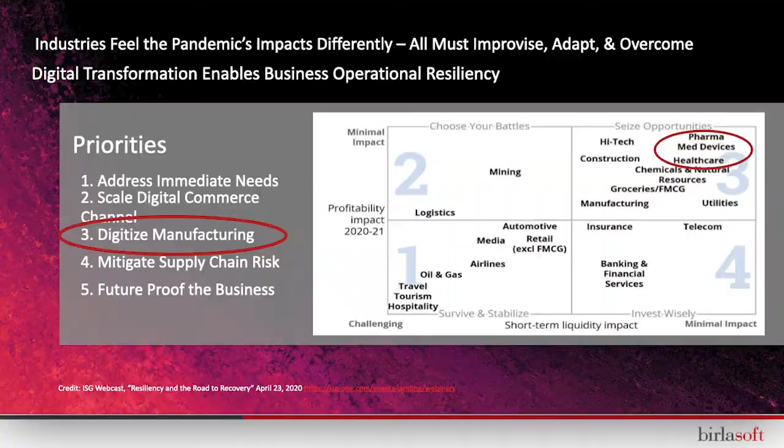Obviously, the broader global economy will continue to feel the effects of the pandemic for quite some time. But when you look at the economy from an industry perspective, it becomes quite obvious that the effects are not uniform, as this chart from a recent webinar from the analyst firm ISG1 shows. Those industries whose occupants have been left fighting for survival are in the lower left, quadrant 1. The unfortunate occupants there include obvious victims in the travel and airline industries. On the other end of the spectrum are those industries residing in the upper right quadrant, who may see selective or widespread opportunities if they have the foresight to seize them.

And this is where medical device and pharmaceutical companies find themselves, for the most part anyway. Yes, there were near-term downturns in elective procedures and non-critical care, but overall companies in this segment are getting on with strategic business adaptations. And you see that digitizing manufacturing is identified as critical when your employees are scattered remotely and need to access the information that's critical to run the business. Manufacturing flexibility has also become a priority.

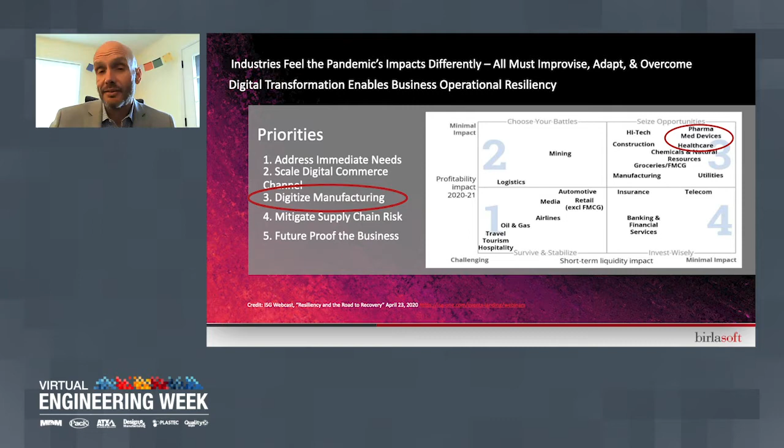I think this also ties in with future-proofing the business, as we're seeing industry invest in modernizing systems, automating business processes, and in data and analytics in a big way - all to ensure IT systems and business processes are hyper-resilient to future disruptions by upgrading, replatforming, consolidating, and automating where appropriate. Overall, companies are taking this time to modernize business applications in general, largely to enable the harvesting of insights from the vast amounts of data being collected these days.

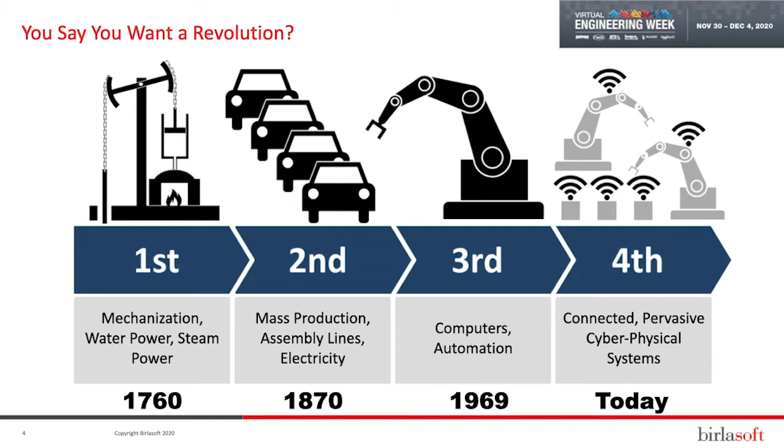You say you want a revolution and you want it now. You're in luck, because we're in the midst of an industrial revolution right now - specifically the fourth industrial revolution. Manufacturing 4.0 and the connected plant concepts are part of it, enabled by connected, pervasive, cyber-physical systems. And the COVID pandemic has only accelerated industry's investments in their digital transformation. As Satya Nadella, the CEO of Microsoft, put it in their earnings call back in April, 'We've seen two years worth of digital transformation in two months.'

We've seen this too. Much of the investment is going on in the life sciences industries as they look to ramp up production of various medical equipment, including PPE, hospital beds, and ventilators, while simultaneously trying to be more flexible - to be able to manufacture anywhere, should another weather disaster or a pandemic unfortunately take some global locations offline.

There's a lot of consideration and talk about bringing manufacturing back onshore. These initiatives generally require agility and efficiency improvements, enabled by enforcing process standardization and monitoring equipment and plant performance across global plants remotely. Also being able to maximize process and product quality and leverage predictive plant maintenance capabilities, all important for driving efficiency, reducing costs, and better serving the customer.

You might be surprised at how big this need is to digitally transform manufacturing. A case in point: one of our large device manufacturing customers has over 50 plants globally, and less than half run on a modern manufacturing execution system. Many manage their product schedules and production execution purely on spreadsheets, or in some cases even on paper.

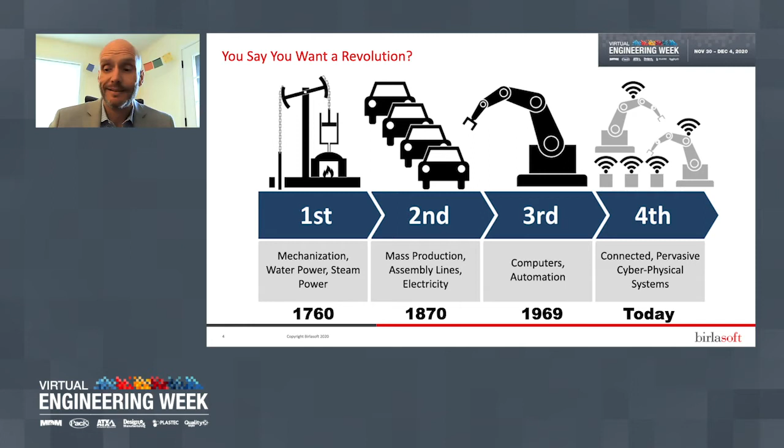There's a paradigm shift we've been seeing with big data. The volume of manufacturing process data, which can be defined as time series data generated by process control systems, laboratory systems, and other plant floor equipment, has increased dramatically in our current revolution. We're now dealing with the realm of big data.

But without the right governance processes and technology in place, big data is nothing more than a wasted opportunity for improvement. According to a recent study, close to 60% of life sciences companies are still using Excel to aggregate and analyze process data, and 61% of those surveyed said they still have data on paper. Wow, so there's massive opportunity for improvement here.

Big data offers a new style of data analytics, different from traditional business intelligence. And with the right analytics tools, its potential to deliver game-changing, highly valuable cognitive insights is massive, and the scope of the insights is wide and deep.

Traditional BI projects require business users to know what kinds of questions they want to ask beforehand. The questions they wanted to ask drove the data model of the data warehouse that the analytics came out of, and how that data was stored. The data model also drove what data was collected and by what mechanism. Creating this enterprise data model could be a lengthy process, in many cases resulting in a system that was slow to adapt to changes within the business, changes to the questions we wanted to ask of that data, and the insights we need as our business realities change.

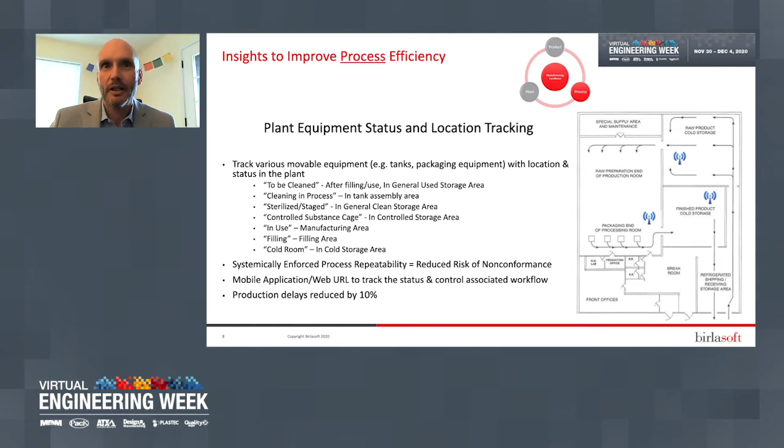Looking at the process, one challenge you may find surprising is that just locating movable equipment and ensuring it's ready for the next production run is a challenge. A startling statistic is that more than 70% of respondents from a recent study aren't fully aware of when their equipment is due for maintenance, upgrade, or replacement, thereby taking it out of availability for production.

We worked with a large life sciences company to put sensors on all of their movable production equipment and tie the location data within the plant to an IoT platform to help them track the location and status of the equipment. Manufacturing systems now have seamless access to that information so it can be systemically and proactively ensured that all equipment is in the right position as well as has the right status, being cleaned, sterilized, in use, or out of service.

And having this process data-enabled and data-controlled, off the spreadsheet and paper, has driven improvements in process repeatability, which has reduced nonconformances and reduced production delays by almost 10%.

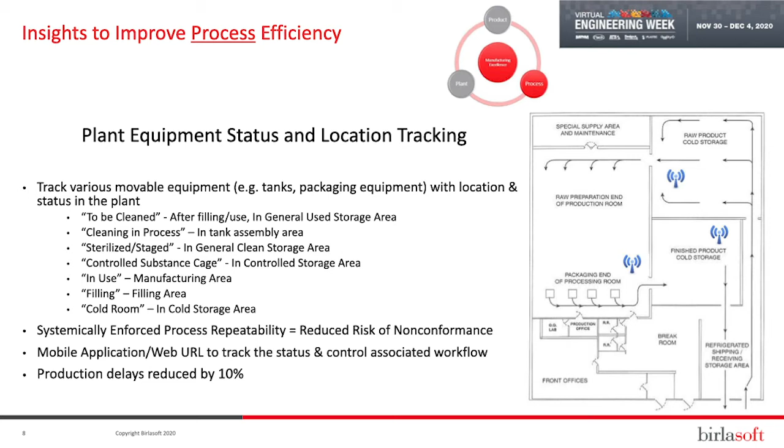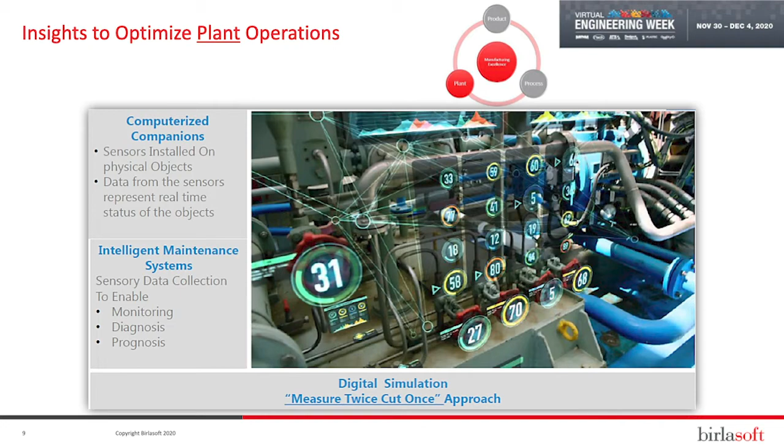According to Aberdeen Research, 82% of companies have experienced unplanned downtime over the past 3 years, and that unplanned downtime can cost a company as much as $260,000 an hour. Unplanned downtime results in lost productivity, increased cost to repair and expedite production, delayed order completion, and loss of customer trust.

Enter digital twins. They've been around as a concept for almost 20 years, but the technology has really taken off more recently as big data analytics technology like AI, machine learning, and IoT have come to the mainstream. But what are digital twins?

They can be understood as virtual models of an actual product, service, or piece of equipment, facilitating the convergence of the physical and digital worlds. We're seeing digital twin technology embedded in smart medical devices, but also in the plant equipment used to make those devices.

When setting up a new facility or making physical changes to an existing plant, factory planners need to design, model, and test factory layouts before going into production. But that may not always be that simple. There could be hundreds of scenarios to consider and combinations of plant equipment and where they're set up to consider, and too many unpredictable factors come into play for us to process manually.

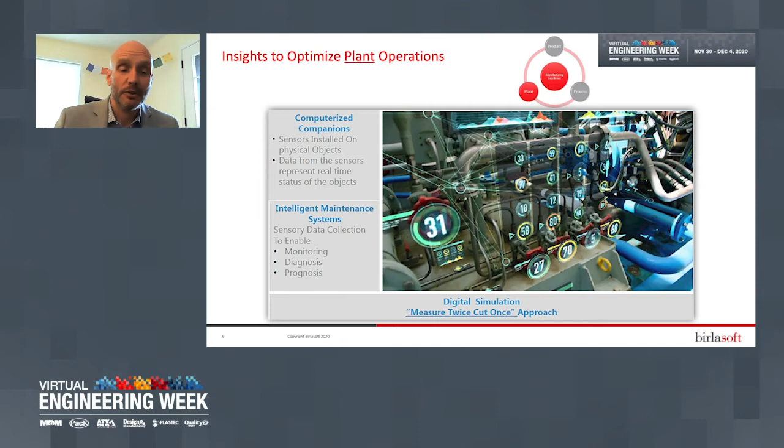But by creating a 3D digital twin of the factory, planners can assess and measure the impact of various assembly line designs and equipment layouts and come up with the most optimal factory plan. The digital twin isn't just a 3D rendering of the physical space and equipment, but is tightly integrated with the equipment designs, providing the ability to track and manage usage and critical performance data that can be analyzed to predict failures and avoid downtime and the cost and customer experience impacts associated with it before it occurs.

So I'm going to hand it off to Adavit now to go through a little more real world examples of what we've done in this space with advanced technologies to help companies digitally transform their business processes in manufacturing.

Hey John, thank you very much, and thanks for that very insightful view. I think to get started, it's very important to have a clear understanding of what your objectives are.

On this particular slide, you'll see there are a few key performance indicators that we have identified. Every organization will have very different objectives. We have worked with some med device customers who said that for them, overall equipment efficiency is more critical. There have been a few customers for whom equipment uptime is more critical. We do have a few customers for whom shop floor productivity is very critical.

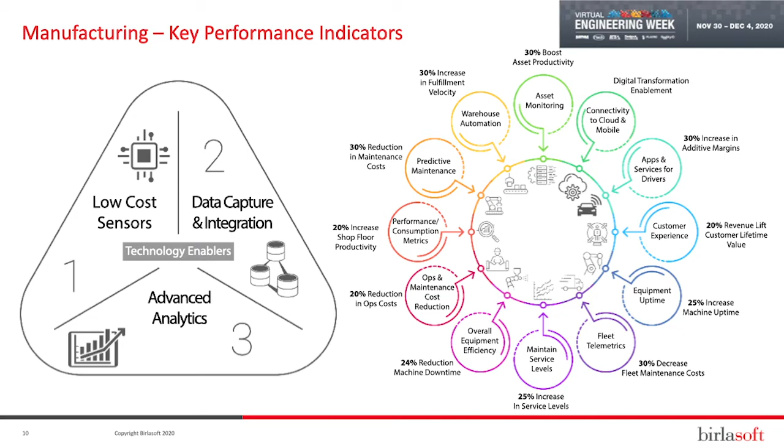Depending upon what the objectives are, we need to start channelizing the data we've collected, putting it to the right use, getting the right level of insights, and helping achieve the level of efficiencies and productivities you are targeting. That's the real core objective.

Now, what's really fueled advancement in this area is what you see on this triangle on the left-hand side: the cost of sensors has started going down. So you have sensors at a very manageable cost that you can put in your products, equipment, or even in your operations.

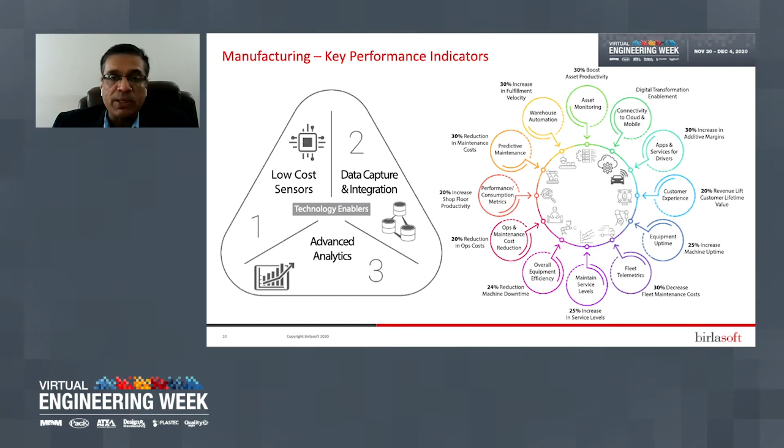The mechanism to capture this data and integrate the information coming from your products or equipment into your process has become much easier. That whole middleware advancement has happened, and that has led to a situation where we can draw a lot of insights from this data and put it to the right use.

Here we would like to share with you the digital thread approach, which is also Birlasoft's 4M methodology. What is digital thread? John did allude to it—digital thread is really about harmonizing the data right across the value chain.

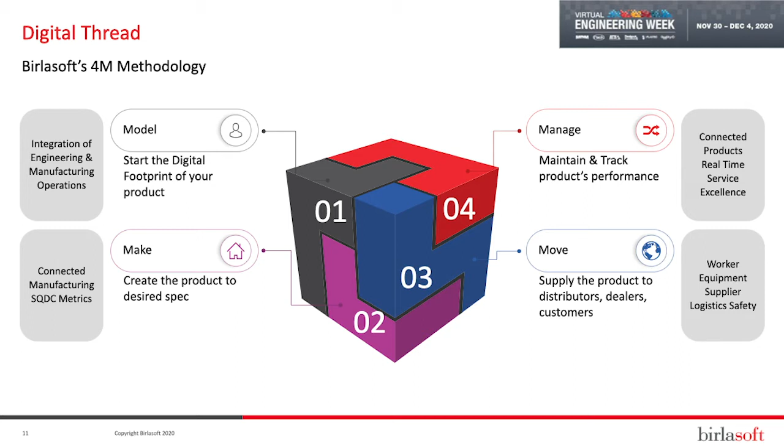Now, if you look at a manufacturer, what does the value chain look like? It looks like the 4M: modeling a product, manufacturing that product, moving that product across its lifecycle, and then managing that product to make sure the customer sees value and it performs significantly well. There are two important elements to note.

The first critical element is making sure you're capturing data across all these phases. The second important thing is making sure this data is leveraged across that lifecycle. This is the value of digital thread, and this is what helps organizations collaborate much more effectively and create significant business value.

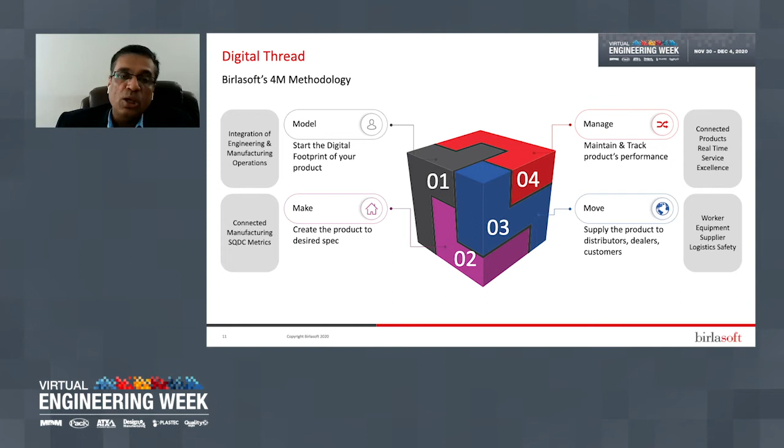What this also does is help you create a lot of these initiatives. So let's look at one of those initiatives that a customer might have.

Let's say there's a customer very interested in improving plant and equipment efficiencies. If you're able to capture this data, you can look at what your plant efficiency looks like. We're going to share a few examples of how some of our customers have done it, giving you insight into initiatives we've seen customers running in each of these areas.

However, if you have a product where your larger focus is on the supply chain side, you might be interested in initiatives like connected logistics, telematics, or simply an integrated supply chain type of initiative. All these initiatives stem from your ability to make sure data is captured, aggregated, and insights are run from that data to deliver value across all these initiatives.

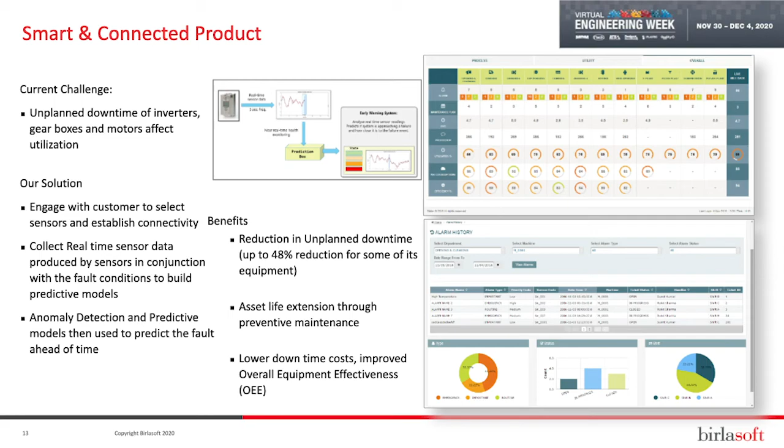The next value we created in this example was, when the technician tries to address this ticket and is trying to figure out what the fault is, you give them some information which makes the job of that technician much easier.

So what you can really provide to them are 2 or 3 things. The first thing you can provide is an asset history, which means that when the technician shows up and starts looking at that particular asset, he has the ability to look at what has been the previous history, what has gone wrong on that particular product.

And that's a very important use of the data. The second piece is you can help give access to a knowledge base, and given that you're capturing this particular data, he understands, hey, these are probably the 2 or 3 areas I might want to look at. You supplement that information by giving him data on how to open that particular asset or how to take care of it.

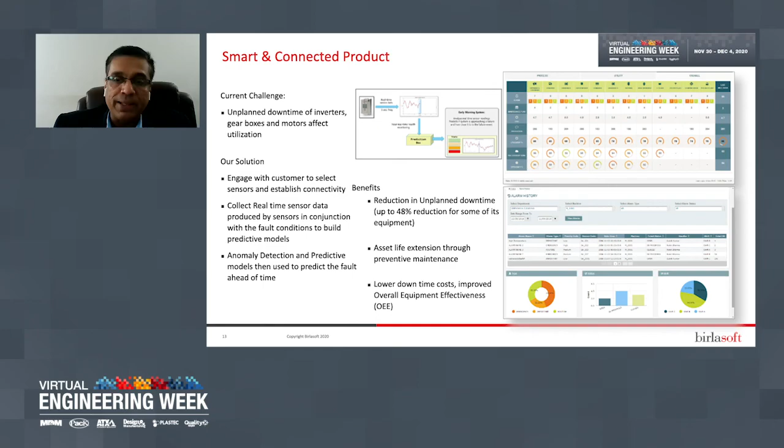Now let's take a look at smart and connected operations. In this situation, what you're trying to do is make sure your operations are running very, very effectively.

Now, your operations have multiple tenets involved here. You have data coming from your shop floor where manufacturing is happening. You also have data coming from your ERP systems, your MES systems, some of the assets you've created, and also from your CRM systems.

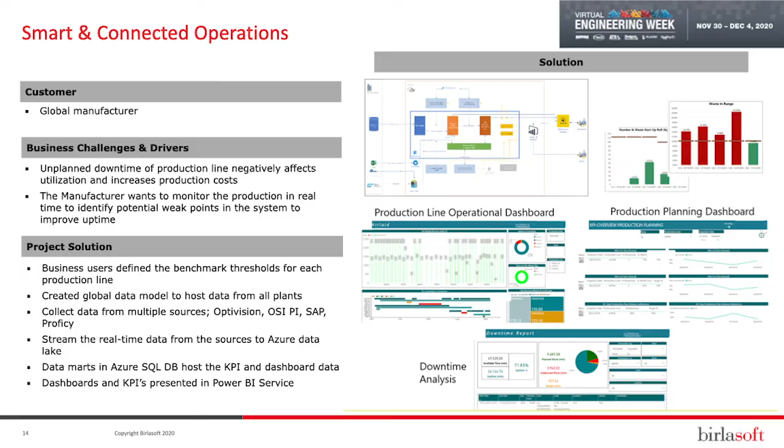Now, if you see, operations folks are very, very focused on continuous improvement. They want to look at a few parameters, trend them, and make improvements on a periodic basis. Getting data across all of these elements is probably one of the best ways for them to stay on top of their operations and help move forward.

The first example was really about, if you have the data, how you can make sure your product is performing really well, and how you're able to create specific models where you optimize the performance of the product.

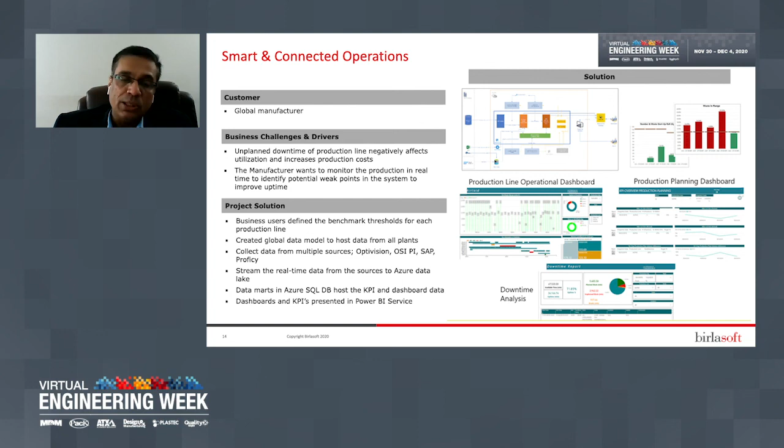This particular example was really about how you improve operations using this data. And as I mentioned, it was all about not only looking at the trending, but also getting a real-time view and trying to address situations or events before they really occur.

The third element is going to be about real-time or process quality. Now, in many of the examples we speak about, there are situations where you cannot wait for the entire process to get completed. You might want to not only capture data in between the processes, but also do a quick sampling to check if this data is in line with your expectation.

And this is something which helps you potentially reduce scrap and reduce rework. So this is an example of work that can get done, which is really implementing your MES or MOM systems, where you capture the data coming in intermediately and run a sample across it and take some very, very proactive actions.

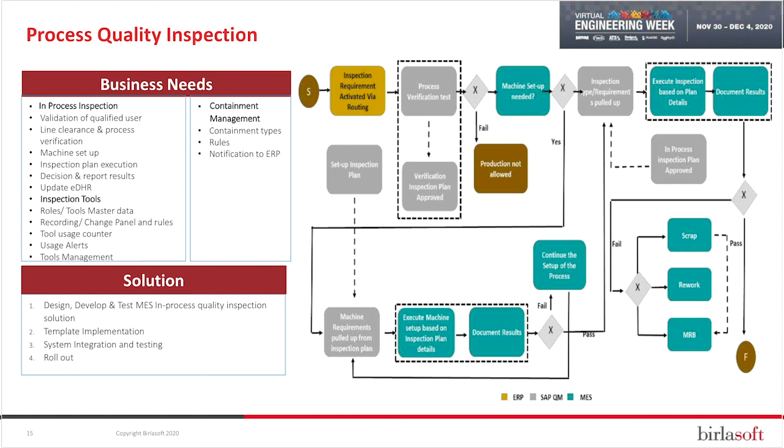So just to summarize, there are multiple elements where you can leverage this data once you have the ability to capture it. But you always need to start with setting up the objectives of what you want to do with that particular data, and what value it brings to the business. Once you have those objectives set, you can go through some of the examples we outlined.

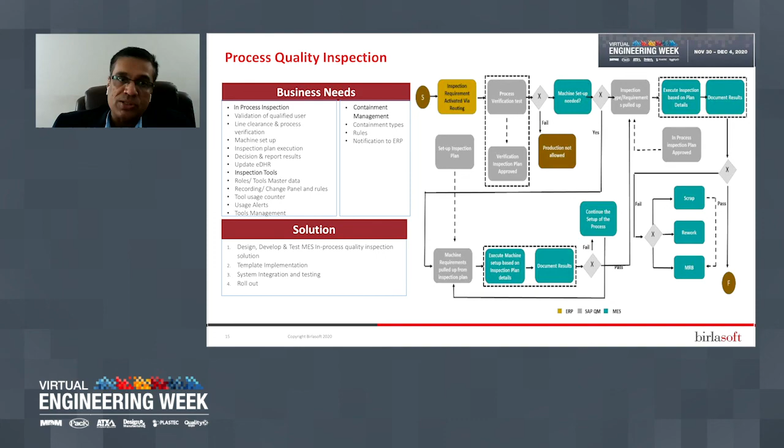Either you can improve the product quality, that's number one, or you can improve the overall plant performance, that's the second one, or the third is you can improve the actual processes, which we were trying to outline in these three examples. Thank you very much.